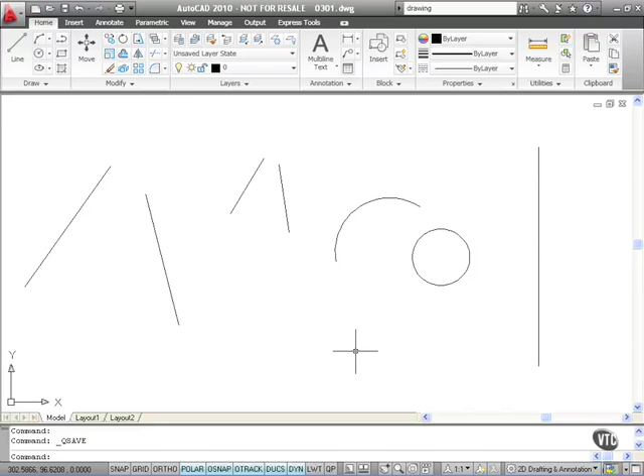We're now going to look at the new parametric and dimensional constraints available in AutoCAD 2010. These are on the parametric tab here on the ribbon, so click on parametric, and as you can see we have a geometric panel, a dimensional panel, and a manage panel to manage the constraints that we place on the drawing.

Let's have a look at these two lines here. We've got this line and this line. I want this line to be parallel to this line, so that's a geometric constraint. I'm going to go to the parallel option here and click on parallel.

I'm going to select the first object, the line that I want objects to be parallel to. I click there, and it prompts me to select the second object. Notice the little parallel icon following the pick box. I select the top part of this line. If I select the bottom part, it'll go parallel from that endpoint instead, but I want to go parallel from this endpoint here, so I click here. Now you get this little parallel constraint icon, and the two lines are always parallel to each other.

When you hover over an object with a constraint on it, you'll notice a little blue icon, a white box, and a blue box, letting you know there is a constraint there. We can hide those. If I go up here to show all and click show, it says select objects to show constraints. If I click there and enter, it shows the constraints. If I go hide all, they disappear, a bit like layers where you freeze and thaw your layers. If I do show all, it brings them back.

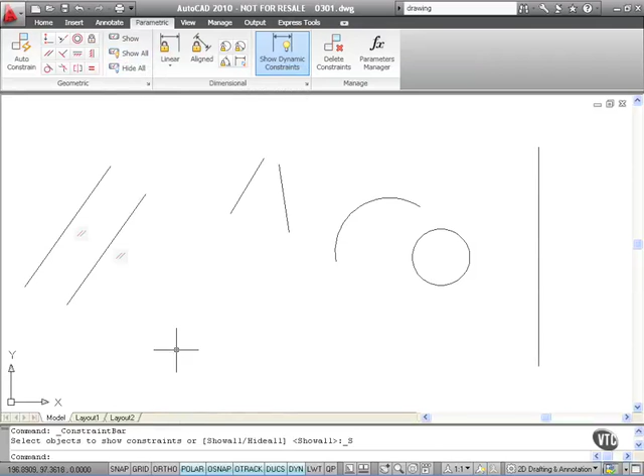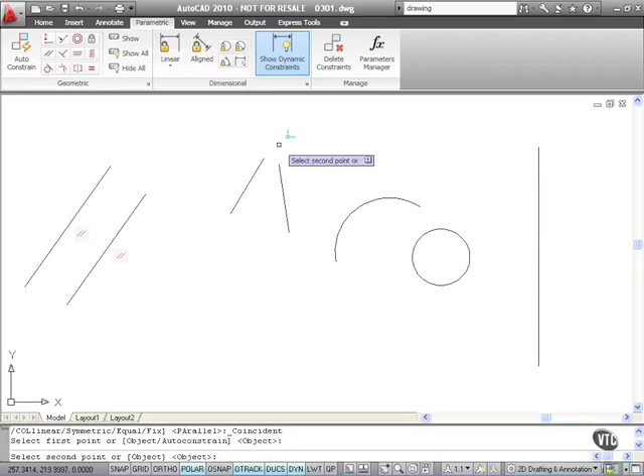Let's have a look at a different type of constraint, a coincident constraint. Say I want these two lines to intersect where this endpoint and this endpoint are coincident to each other. They will always then be coincident because that's what the constraint does - it constrains them to the coincident point. That's this icon here, coincident. So if I click here and select the first point, this end, left click, then the second point, this end, left click, they're now always coincident.

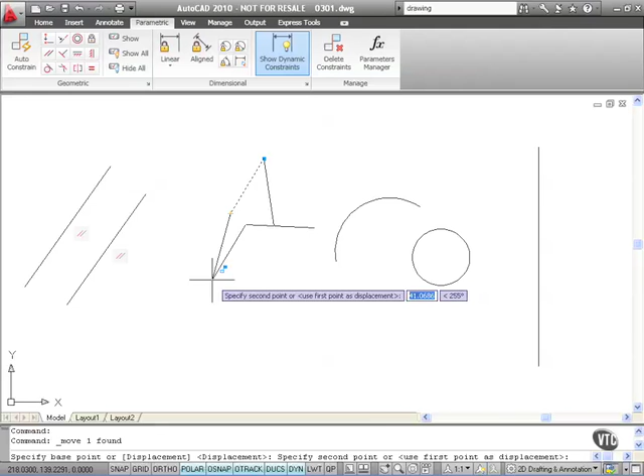Notice this line moved over to be coincident at this point. Now if I click on this line and move it - I right click and go to move on the shortcut menu, and move it using this endpoint - if I drag it down there, can you see what's happening? The other line remains coincident at that endpoint, it just drags and moves around. So if I come down here and click, they are still coincident at that point, as you can see.

Another constraint we can use is we might want this circle to be concentric with this arc. Let's use this icon here, concentric. I select my first object, the arc, and then the second object, the circle, and it makes the circle concentric to the arc, similar to the parallel one. First object is the datum object, second object is the object that follows the constraint. Now those are geometric constraints.

Let's have a look at a dimensional constraint. I'm going to show you a very basic one, a linear dimensional constraint. This line here, if I click on it and hover over one of the grips, you can see there is a particular length. It's a standard line, so as you can see it's got standard grips, endpoint and midpoint.

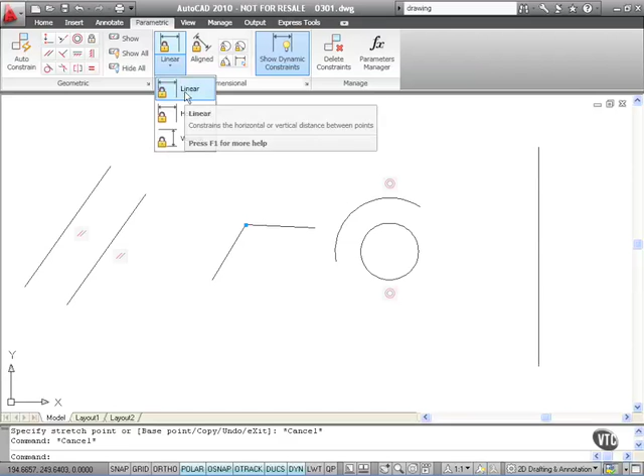What I can do here is make one of these grips live and click on it, I can stretch it, move it around just like any other line. I don't want to do that though. I want to fix this line to a particular length, so I don't want it selected by way of grips. I go to linear here, and I want a linear constraint. Linear is either in the X or Y direction in AutoCAD.

The first constraint point is up at this end, left click. Second constraint point, this end, left click. Then I can specify where the dimension line is going to go. I'm going to place it there, and it's telling me how long that line is, 130.789 millimeters at the moment. If I click there, it places the dimension line, and I can edit the text. Now that's not just multi-line text, that's the actual length of that line, and the D1 is saying that dimension has to be a fixed length.

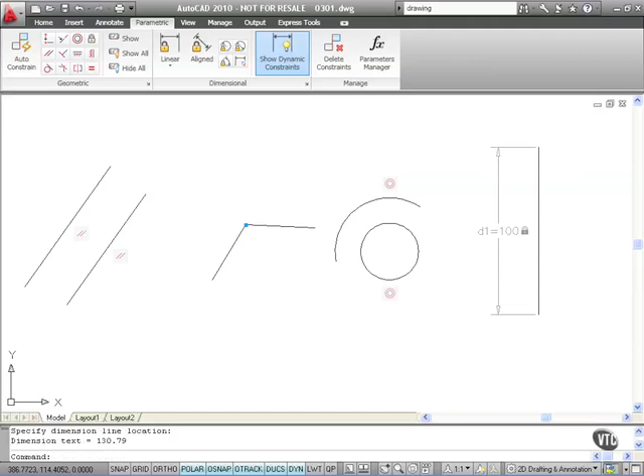So if I change that value in the box to 100 and press enter, that line is now constrained and locked to always be 100 millimeters long. So if I click on that line, click on the grip, and stretch like that, look, can you see what happens? That distance is always 100 long. The line will be longer because it's an angled line, but that dimensional constraint in that direction makes sure it's always 100. That's very useful if you're creating objects with fixed sizes.

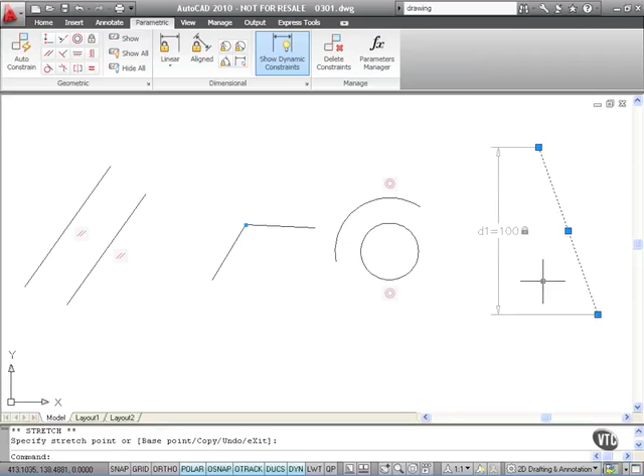And I can click here, show dynamic constraints. If I take that off, it disappears. Click on it again, it comes back. Again, show and hide, show and hide, very much like layers.

Now to delete a constraint, I click on this button here, and it says select objects. If I click on that line and enter to confirm, it deletes the constraint, and it just goes back to being a normal object again. I can do that with these objects here as well and remove the geometric constraints if I wish.

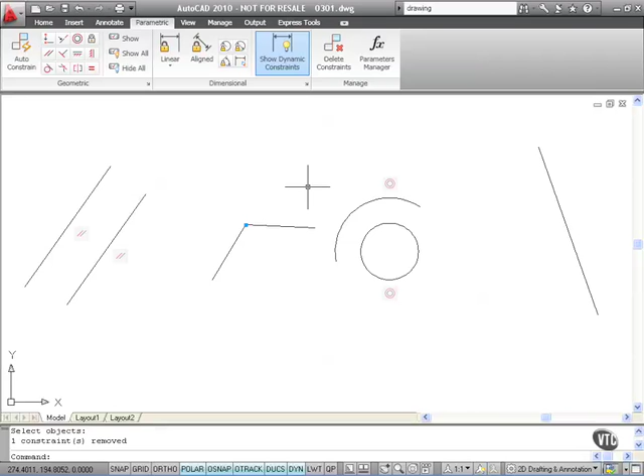So you can see there in AutoCAD 2010 that these geometric and dimensional constraints are very useful for regular, repetitive tasks in AutoCAD 2010.